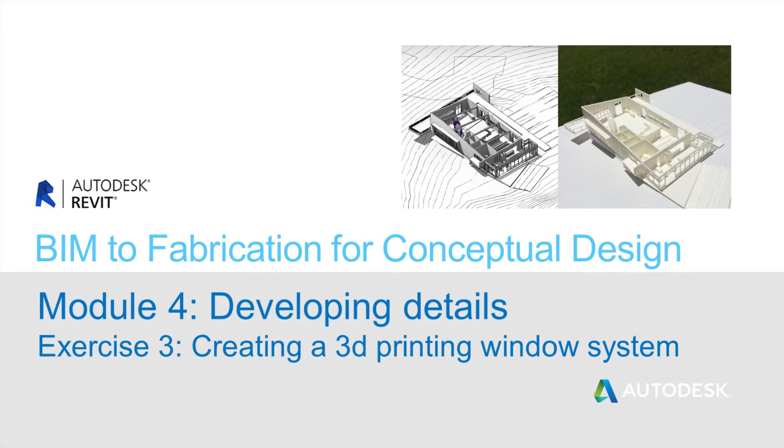Module 4, Developing Details, Exercise 3, looks at a slightly different method of doing 3D windows using 3D printing. Instead of printing them in situ inside of the physical model, we're breaking the models out and printing them as separate pieces. We'll look at what's not printable about windows, modify existing mullions for fabrication, and leverage the right print settings to get the right results.

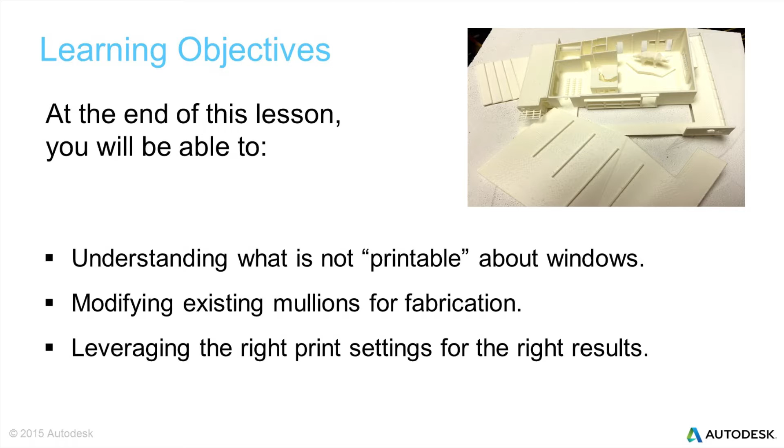In exercise 3, we're still looking at crafting windows, but using a slightly different method this time. We're going to turn to a 3D printer to actually build the mullions rather than cutting them out. One of the things we need to work through is increasing the mullion size. There's another issue as well: the 3D printer isn't going to differentiate a piece of glass from a mullion, so we need to make sure we hide those later on.

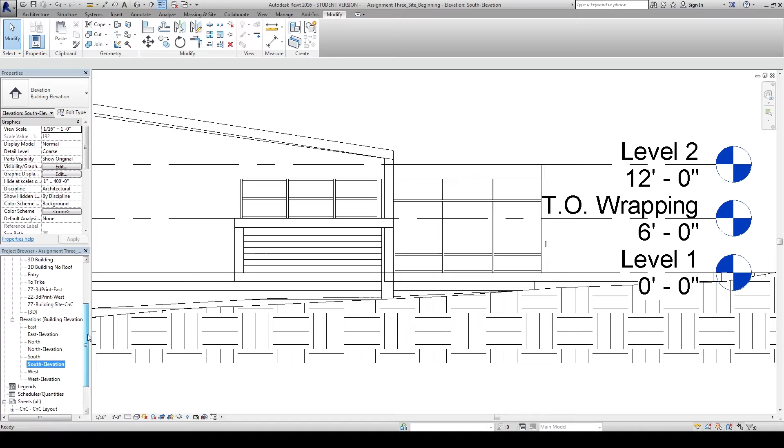When working with a 3D printer, one reason we're not just printing these as part of the original base model is because the mullion size is so small. Even increasing the size and printing the mullions vertically, we have a lot of spanning that's going to happen, which makes that 3D printing process very difficult. So isolating them and printing them separately will build a window we can put in place much more easily. Let's go to a 3D view and begin isolating the windows.

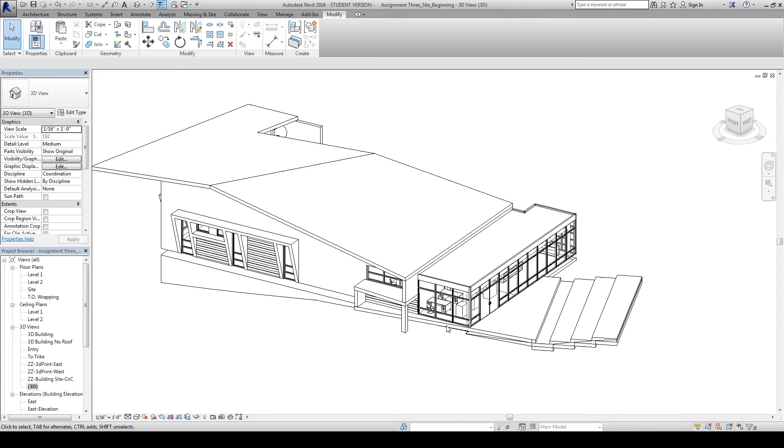So we can send them individually to our 3D printer. I'm not going to do this with all the windows, just a couple, to show you the same techniques that are then replicable for the rest. So I'm going to isolate this particular window.

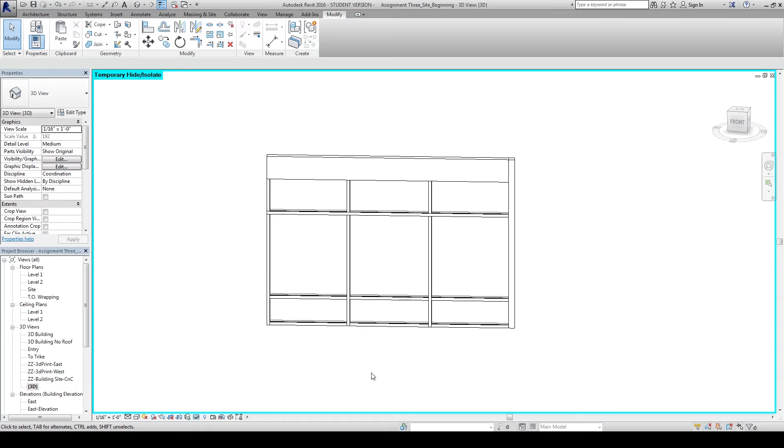The next thing we need to do is increase the mullion size. We need these to be printable. So 2.5 inches at a 1/16 inch scale is very small, so we're just going to overwrite the overall size and increase the mullion to a 6-inch wide mullion, 3 inches on each side. Next, we also need to increase the depth a little bit, just making those windows and window mullions a little bit stronger, with a few more layers of the PLA plastic.

So one of the things to remember with that 2.5 by 5 inch mullion, since we're increasing the size, we need to make sure we remember to decrease that later on in the process.

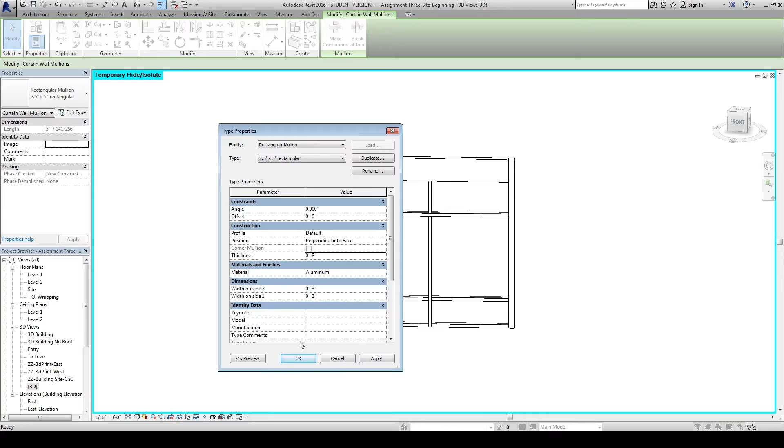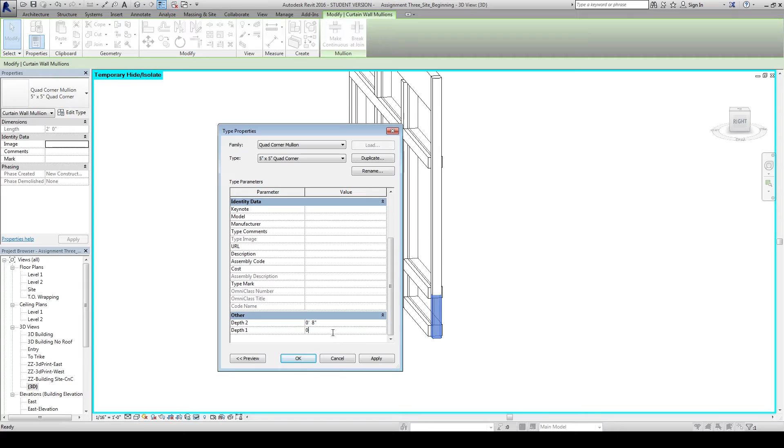If I look at the edge, one of the other things you're going to notice is that the depth of each mullion system is different, and that's going to create some printing problems. We want this to print completely flat on the base, so I need to modify both the edge mullion and the top mullion, increasing that to 8 inches. This is changing the corner mullion by 4 inches and 4 inches. Now we have a completely flat surface, and we'll do the same with the top mullion. Now we won't have any issues with the 3D printing process.

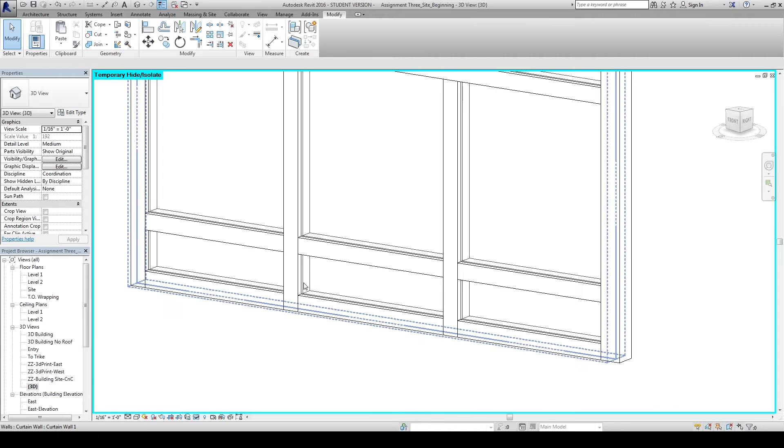The next thing we need to do is hide the glass panels, because the printer is going to see that geometry and simply try to build it, and what we're really looking for is a window that's transparent. So let's select everything, use the filter to select only the panels, right-click, and hide the elements. This is now ready to export. Simple as that.

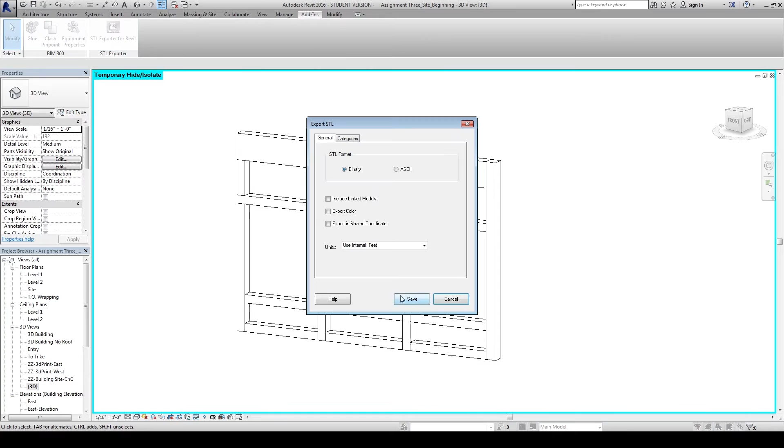So provide a name and save. Again, make sure you're using a solid naming convention, because this will get fairly complicated if you have a fairly large model that you're putting together.

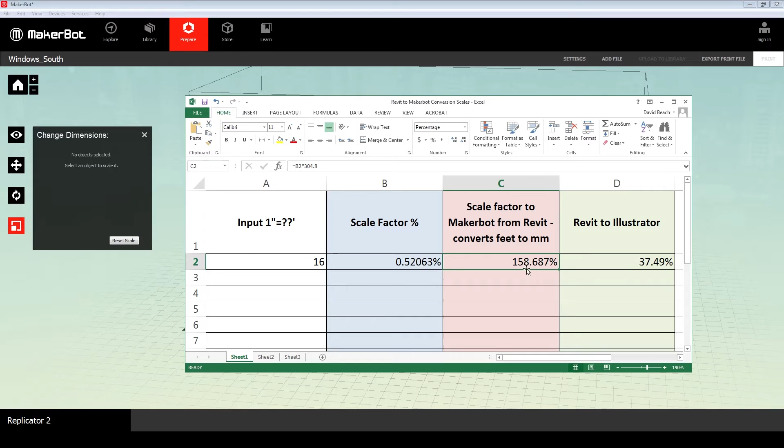So the first step, once you're in Makerware, is to increase the scale. Again, I'm going back to my Excel spreadsheet. I'm going to use the 158.69%.

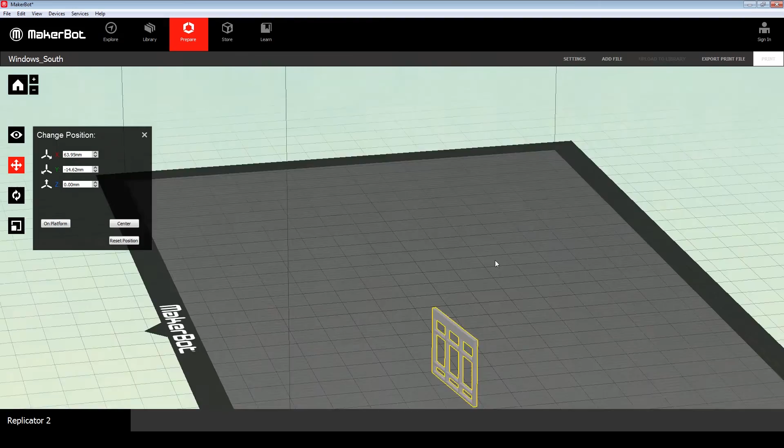The next thing we need to do is essentially lay this down flat. So what the 3D printer is going to be doing is tracing out the lines. There won't be any spanning or difficulty in terms of putting this together. This makes for a really simple print and a nice piece that we can glue in place.

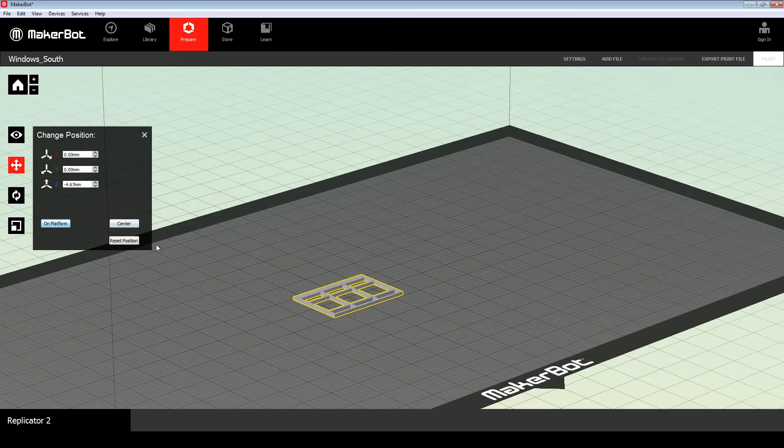So simply rotate it around, run the lay flat, and now I have that piece ready to go. Let's do the same technique with one additional window, the same window that was a little bit tricky in terms of getting the line work.

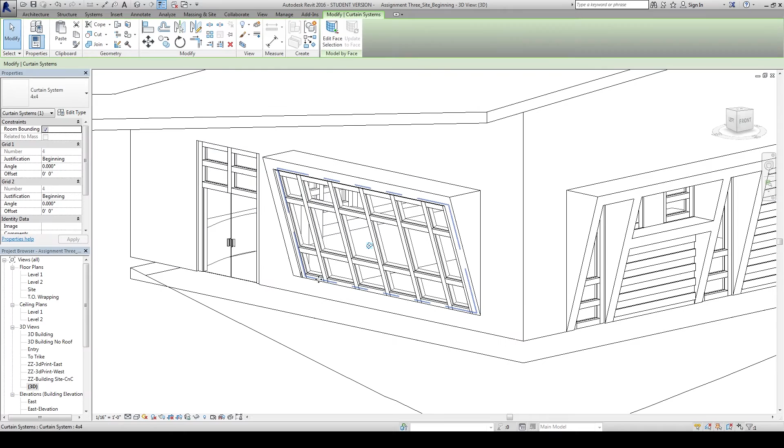We had to use model lines on this one. I don't have any more complications with this version in terms of building the model, because it's going to handle this particular window the exact same way. So again, we're going to select the element and isolate it. I've already made the modifications to the mullions, so I simply need to select everything, run the filter, select the curtain wall panels, and hide them. Now this is ready to export.

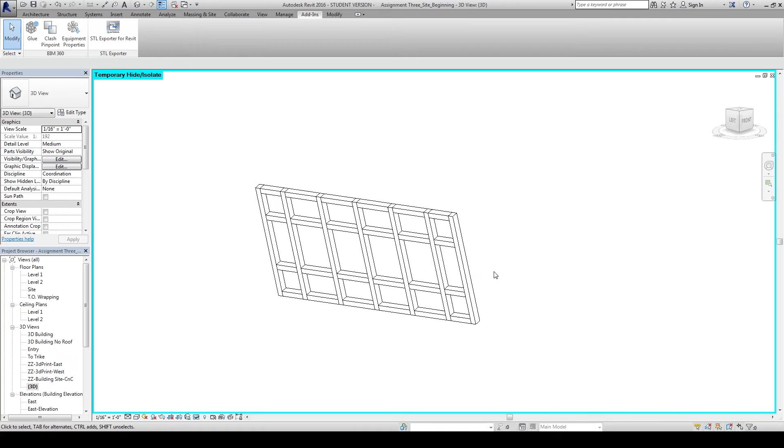And we're ready to open that file up in Makerware.

So we're going to reestablish the scale, 158.69. Keep in mind, this is a window that's happening inside a very specific frame, so I might want to drop that scale by about 2% so it fits in, but we'll just go ahead and run with the settings for right now.

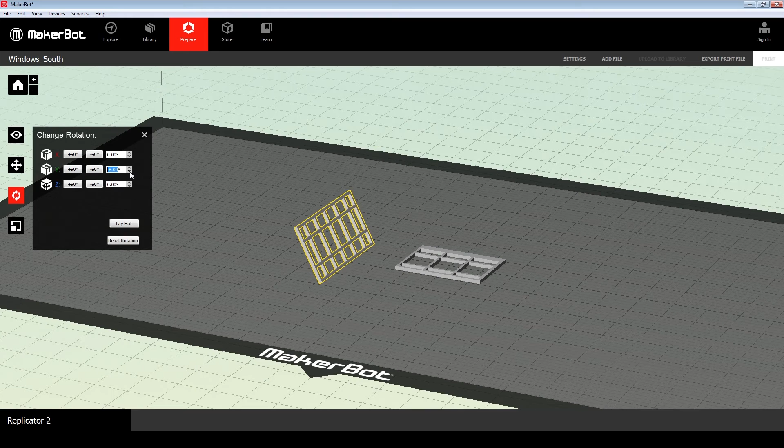So we're going to go ahead and rotate this around again, and I'm going to use the lay flat command, but I want to point it in the right direction so Makerware knows exactly what I'm trying to do. Lay flat, I'll put it down perfectly.

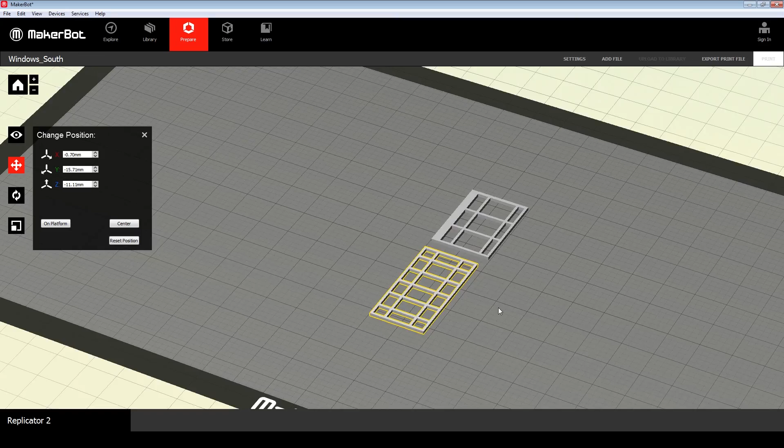Now I want to show one more feature. With two windows, this doesn't make a great big difference, but we'll go ahead and center the model, and then I'm going to use the auto layout routine inside of Makerware. Essentially, this will organize whatever you're 3D printing in its most economical pattern, which is very helpful in terms of speeding up the printing process.

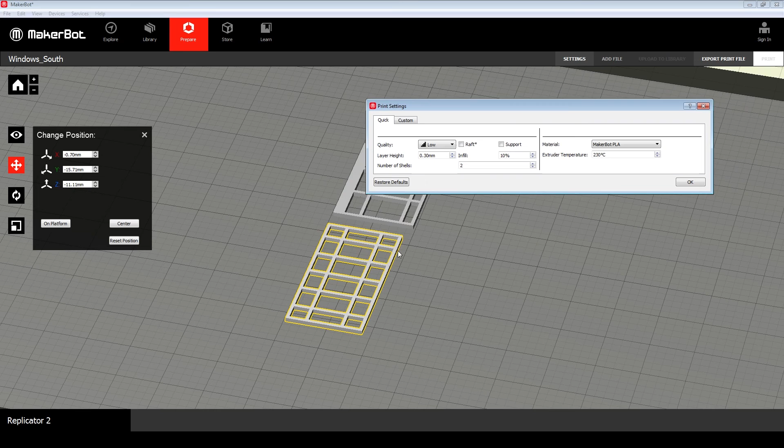You can see it took no time at all to process this, but I do need to go back and check my settings. I want to use some different settings for this particular 3D print than what I would typically do. For starters, there's no reason to run supports, this is all flat. And while I typically run a raft, this is something you really don't want a raft for. These are going to be very small, delicate pieces, and trying to peel them off the raft is probably going to break them. So I want to make sure my base plate is completely level, because these are going to print directly onto the base plate.

I wouldn't do 10 or 20 different windows on this. I would keep it small and simple so that they don't cure very quickly to the base plate, easy to pull off. And I want to increase my resolution to either standard or high simply to get more layers of plastic, and it'll build a slightly stronger mullion pattern for me as well. So we'll say OK to that.

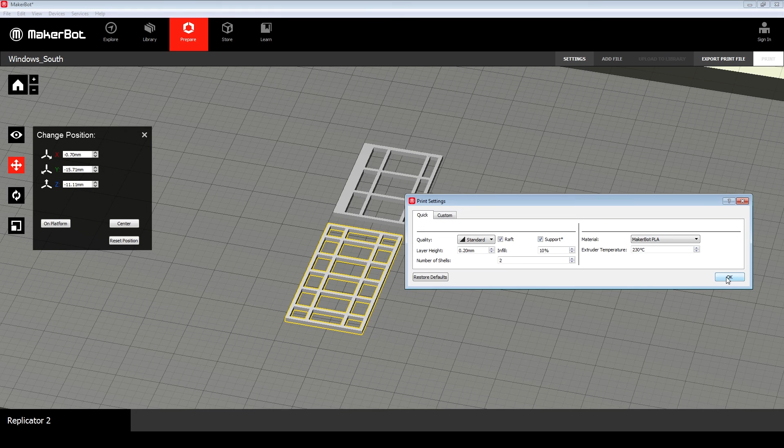I'm going to rerun the export. You can see, again, really no time change at all, just 9 minutes.

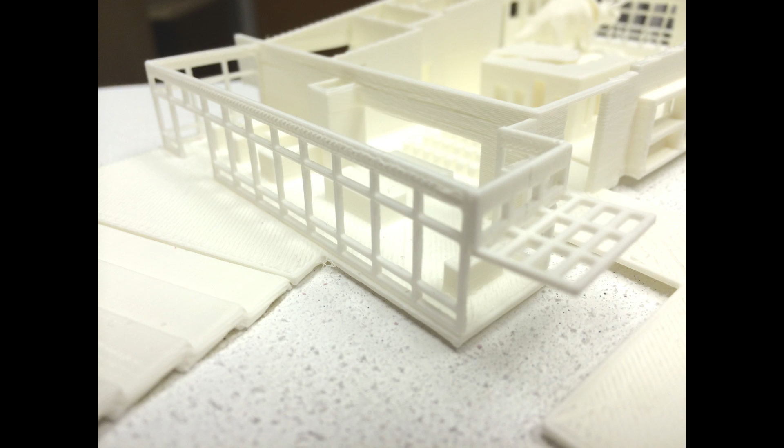So the final windows ended up printing out very quickly. They look very sharp, and I'm really happy with that technique in terms of how I want this model to look. So in this exercise, again, we acknowledge why 3D printing windows doesn't always work out well, modifying window mullions for the 3D printing process, and building printer settings for finer detailed objects.